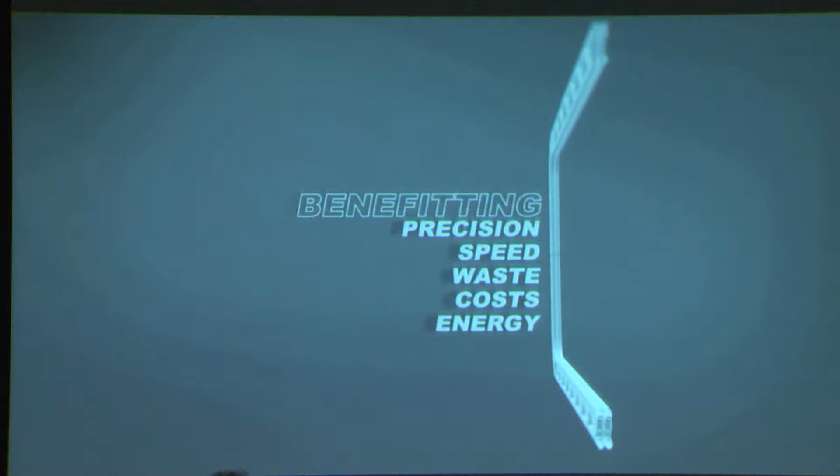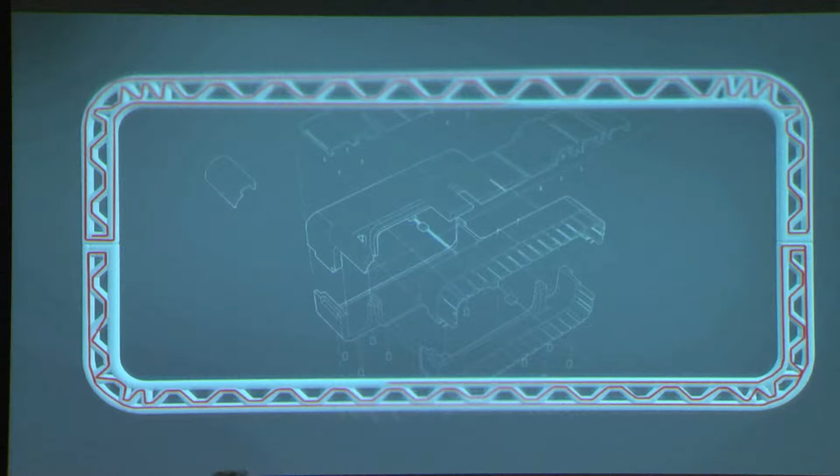in Scottsdale, Arizona. And I joined Gensler about 3 years ago and was asked to work on the project that you're going to see now. Our client had discovered a 3D printer entrepreneur in Shanghai who had developed a concrete mixture and printer head to basically manufacture housing, and we were hired to look at a whole series of prototypes for the United States and Haiti, Ghana, Egypt, and Saudi Arabia, and we put together a whole series of building types. This is one particular module.

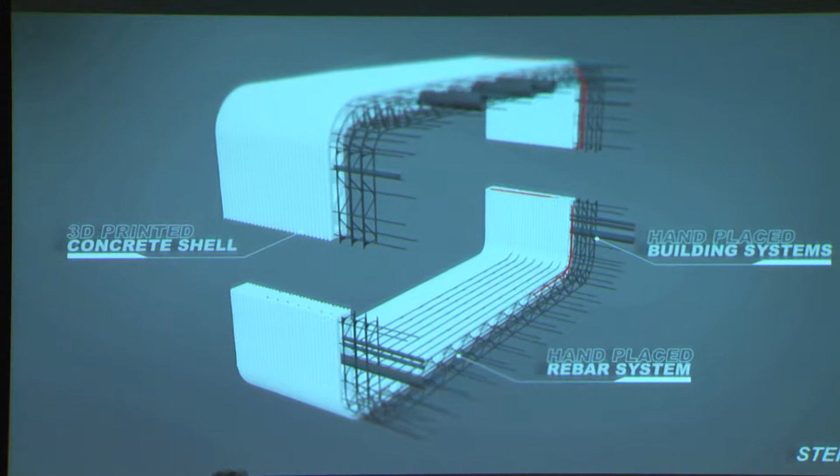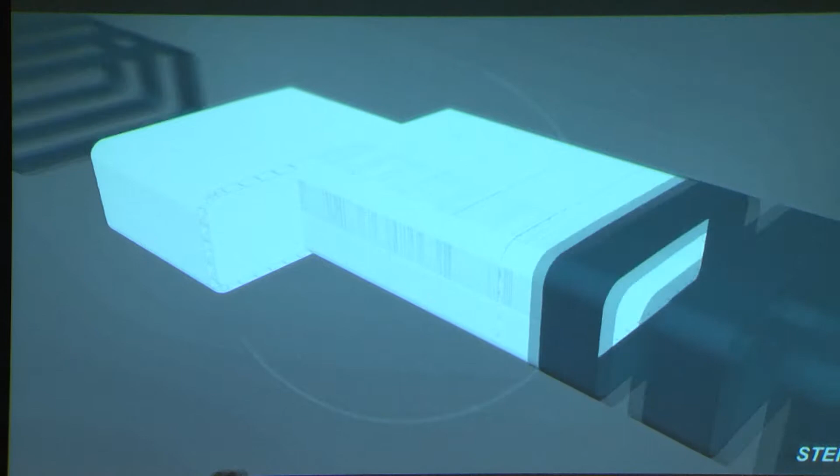After we had finished that study, he sold a building to the Prime Minister of Dubai and gave us 6 weeks to design a building and have it fabricated and installed. And so we began looking at how to do that. The building was printed in Shanghai over a period of 3 days, and then we had to ship it to Dubai in order to have it installed. So you can see, we had to figure out how to do that. It was a whole series of concrete modules. The interior finishes were to be 3D printed. The exterior enclosure was also 3D printed. And that was our concept.

You know, I think I said the components were printed in about three days, and it was erected in a little over a day and a half, probably 2 full days, quite frankly, in the middle of the night when it was a cool 115 degrees in Dubai, since we were doing it in the middle of summer. And this just shows some of the components.

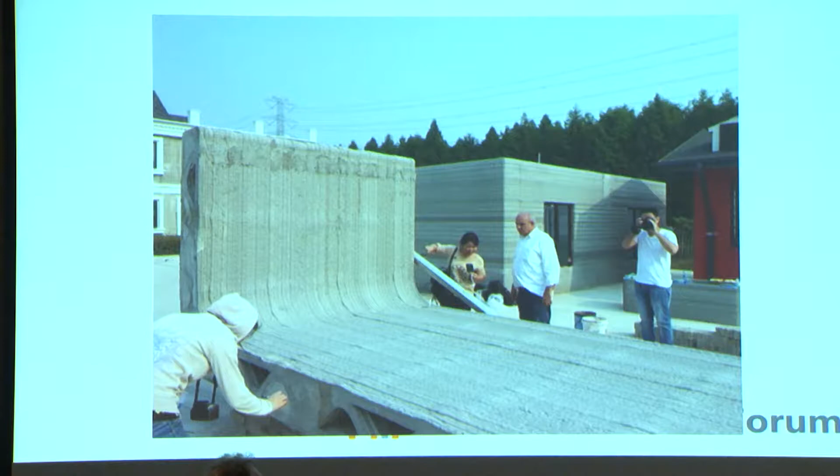The printer had the capability of printing product that was 22 feet wide, 33 feet high, and 105 feet long, which didn't do us much good for shipping overseas. Our components were effectively about 7 feet wide and 11 feet tall. They were put in 2 pieces and 24 to 30 feet long. And you can see them after they've come out of the printer. It's a series of layers of concrete that have been set with the printer in sort of a factory environment.

Here's the pieces arriving in Dubai and being installed on top of each other and next to each other. And the white object on the bottom is the finished building. It was actually a 2,500 square foot office building that they used for the PR and events planning folks at the Office of the Future, which is at the Museum of the Future, which is being developed on the Emirates Tower site here. And the interiors of the building are effectively just open office environment.

The real key was that the structural core was 3D printed. The remainder of the interior construction and exterior enclosure was traditionally built thereafter just because of development costs. We had never printed a single component and built this building without any other options.

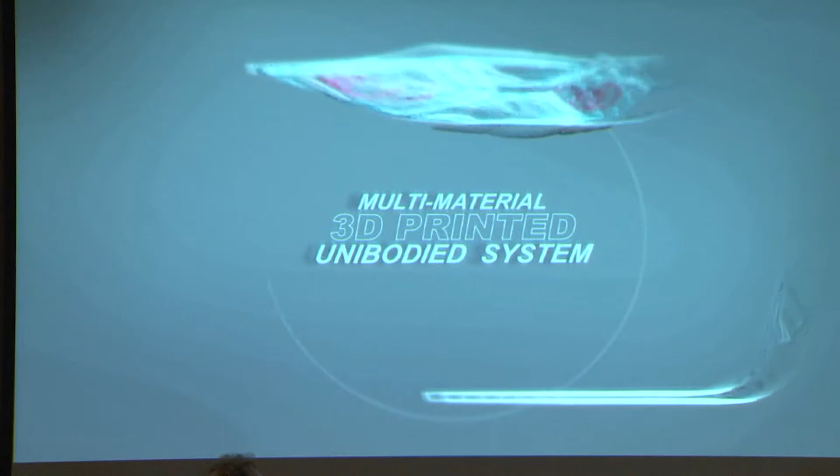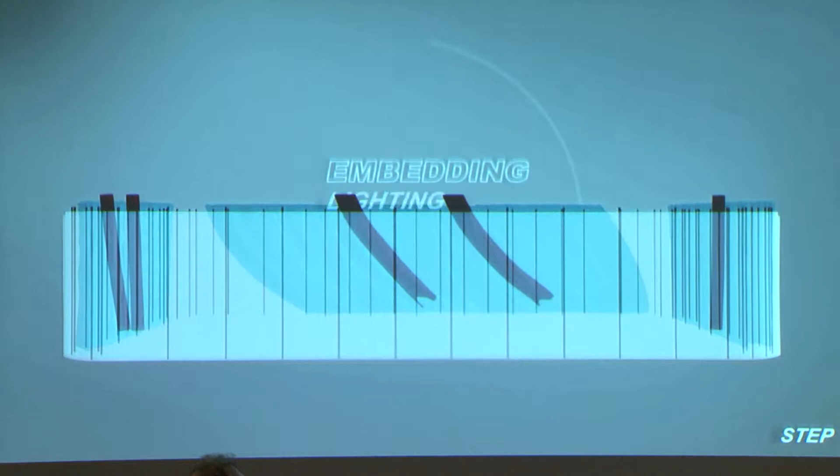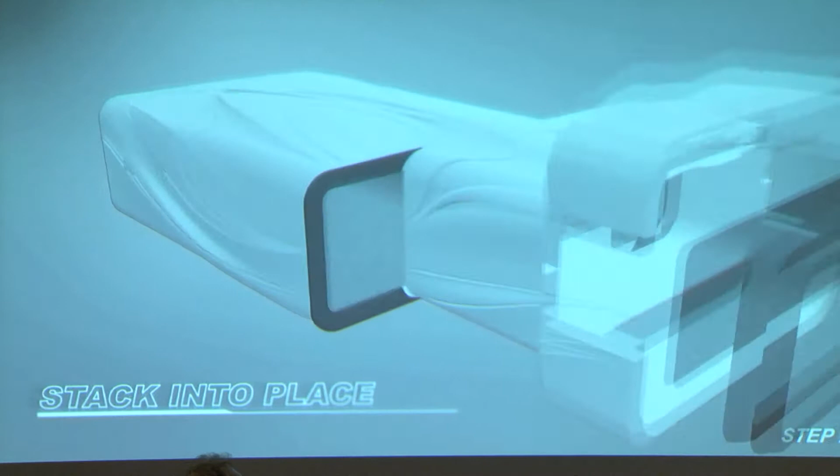Our real desire was to develop a system whereby we could print the entire component of the building, the structural core, the outer skin and the interior finishes, as well as all the MEP systems into the print, and really create a sophisticated smart wall system that would be able to be connected together and bring all the services to the building, and simply connect these components together and build a building essentially that fast. One of these can be printed in about 6 hours, and assembly is as fast as you can assemble. So that's really our goal.

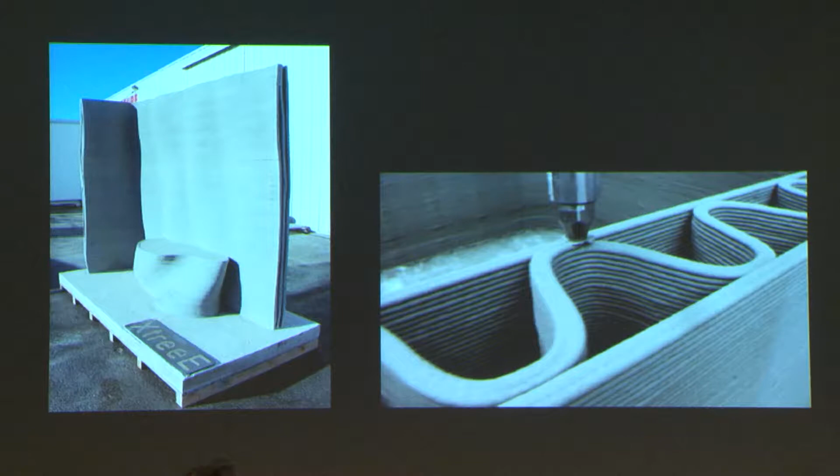We've started working recently with a new group out of France called XtreeE. They're manufacturing printer heads. You can see a bit of the printer head on the lower right-hand side of the film. And they're really looking at maximizing the efficiency of the skin in concrete to minimize the amount of material that you use. This is showing their printer. They just use standard robotic arms with a custom printer head, and we have the capability now to print very, very fine objects at faster speeds.

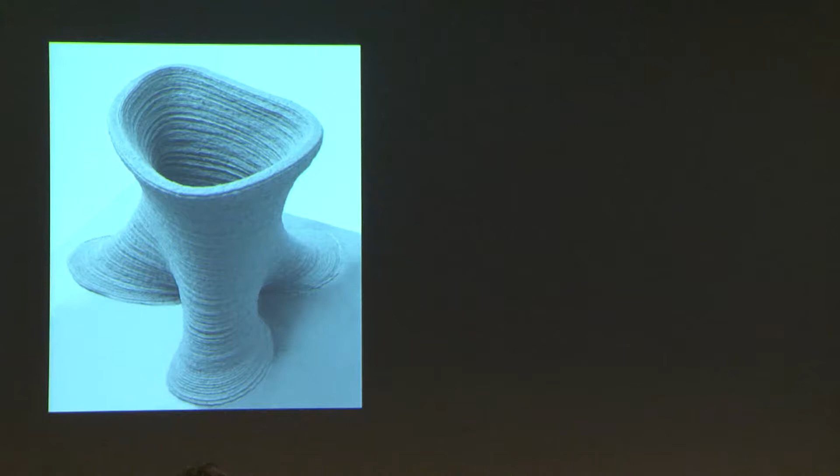The original print we had were layers that were approximately 1 inch thick by 3 inches wide, and now we have the ability to print at about 2 millimeters high by 1.5 centimeters wide, so very thin skins. A lot of very fine detail capability. XtreeE is printing both in concrete and clay. And the clay can be used as a form to pour concrete in, and then you wash the clay away, and you've got a concrete form, and you can actually reuse the clay. So they can do very complex one-off components.

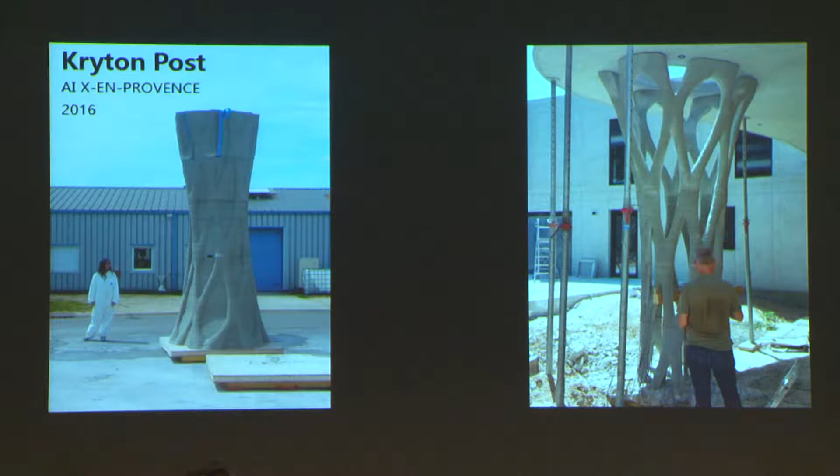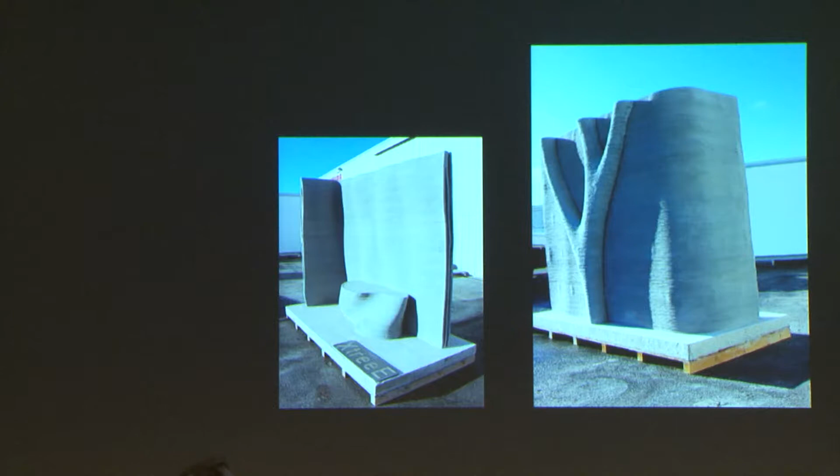The benefit of printing is every single object that you print can be different. So the old concept of modular housing where everything is the same, with 3D printing, that's really not necessary. So it shows the high level of detail that we're able to get. And the other big element of possibility with 3D printed buildings is in terms of the speed of design. We can now design a structure.

Today we design structures three-dimensionally as architects, and then we produce two-dimensional documentation for bidding and permitting. Then the subcontractor will get the two-dimensional drawings and turn them back into a 3D object for fabrication and construction. But with 3D printing, we can design in 3D. We can coordinate the whole project in 3D. We know all the information about the building, the surface area, the quantity, how long it will take to print before we ever start. So we can economize the skin.

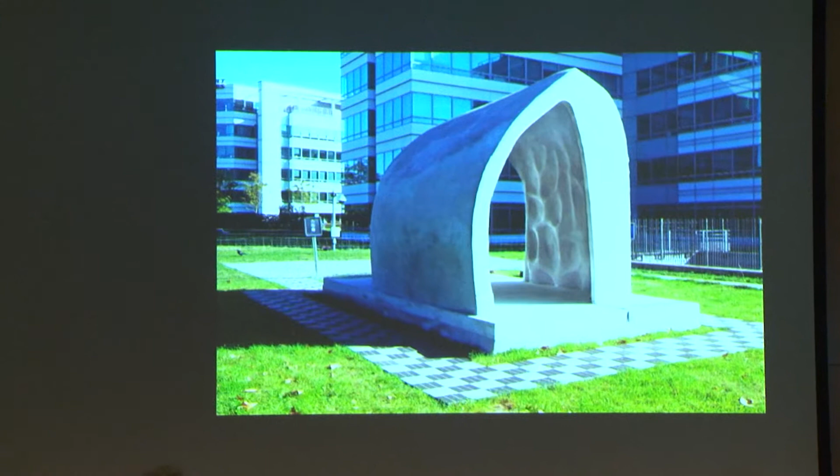And you can see in the interior of this particular object that XtreeE printed, they really optimized the amount of concrete that's necessary to make the shell structure work. So the inner walls are actually bending to the need. And so we can reduce quite a bit of time, because after we finish designing, we can just press print and end up with a building.

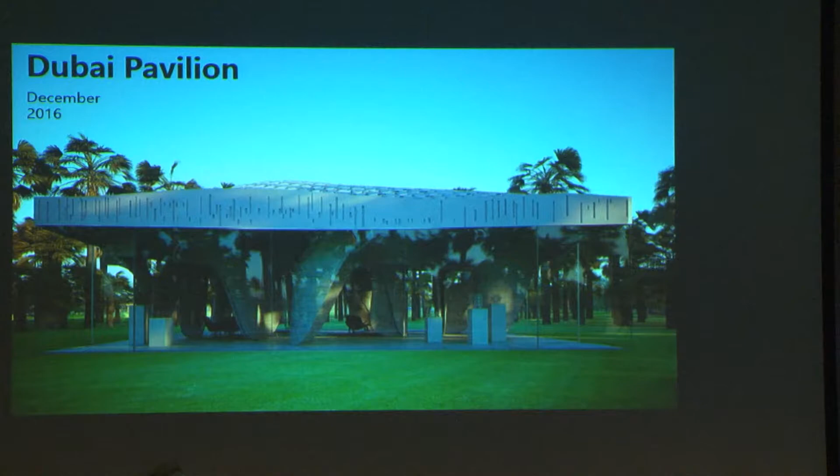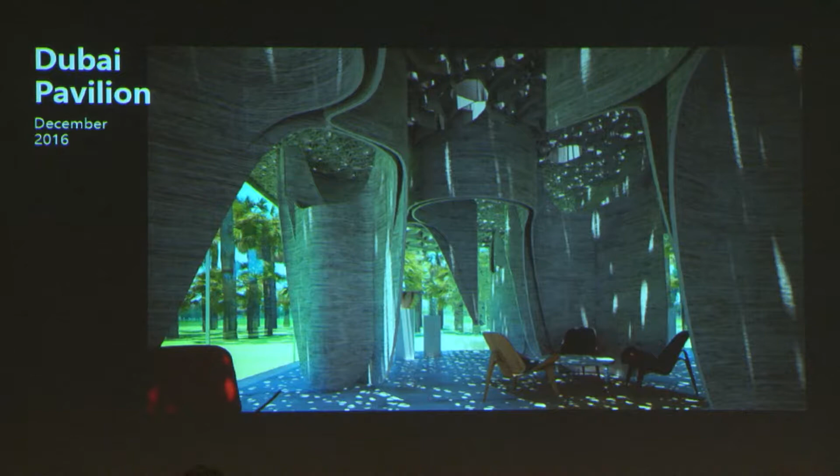And every building, as I said, can be different. The real key today is really trying to develop buildings that really speak to this type of construction. The rectangular form of building, 3D printing allows us endless other opportunities, and really trying to discover what those opportunities are is the next step. So that's it.

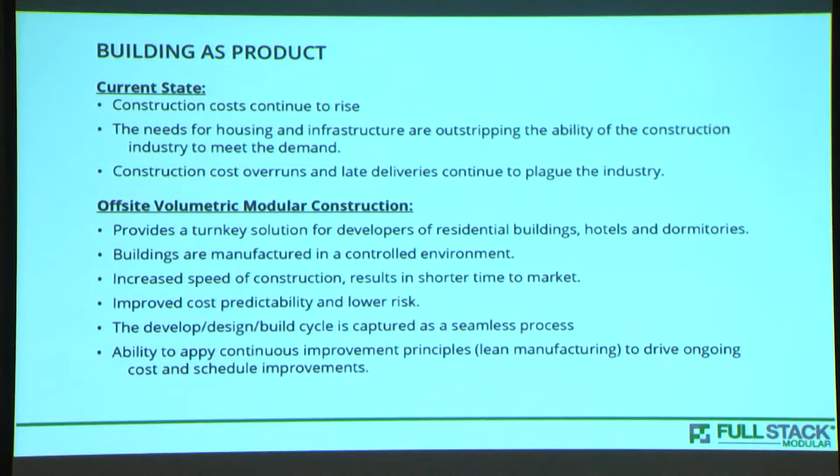And so this is just a little bit of a current state of construction. Construction costs continue to rise. We talked about the needs for housing and infrastructure, and overruns and late deliveries are standard. And as a result of that, and working in New York, which is a high land cost, and I guess if not the highest construction cost in the world, one or two, we as developers were looking for a way to at least control and predict the cost of building products, mostly multifamily, in a dense urban environment. And that's really where the whole high-rise modular process for us started.

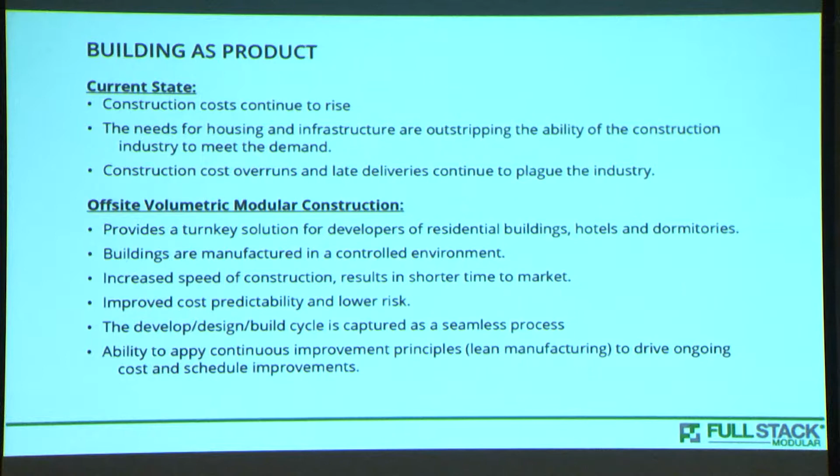In order to do that, you really need to change the process from design, bid, purchase, construct into a completely integrated process. Maybe not by putting in a printer and pressing print, but much in the same idea, at least moving in the same direction. So I figured I was at MIT, I had to have some statistics.

So the current state of the industry, great report from McKinsey, worth reading. It talks about the world economy and how many billions of dollars in the economy it actually represents. For some reason, my slide got cut off, and the turquoise is manufacturing. But it basically just says that construction productivity is flat since 1995. The total economy is up 2.7 times the 1995 productivity, and manufacturing is up 3.6 times 1995. What does that mean? It means the productivity on kind of an hour worth of a $25 rate is significantly higher in every industry and very high in manufacturing.

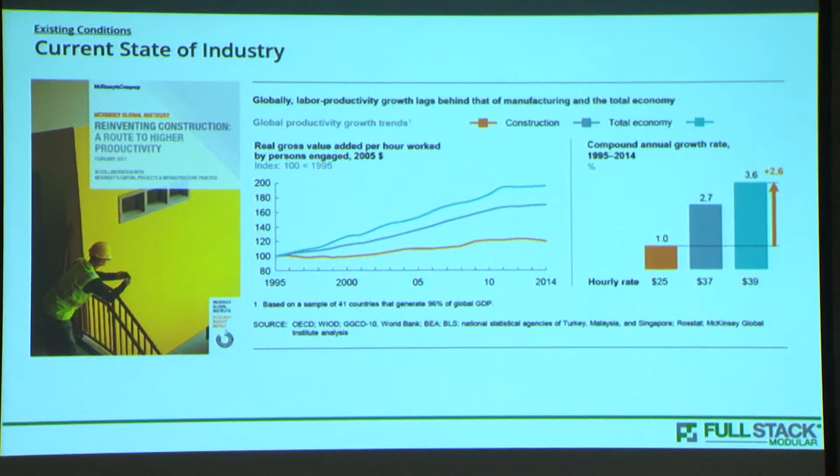And the interesting thing to think about, and I am not a world economist, is the amount of drag that the lack of construction productivity has on the whole world GDP. The fact that we are not productive not only affects our ability to have housing, but it also affects the world economy as a whole.

So our process is as design builders for developers or with developers to create an off-site modular solution for multifamily housing, for the most part, in a dense urban environment.

And so doing and building off-site in a dense urban environment where it's very expensive, security, transportation, et cetera, is tough. It's incredibly attractive. On the other hand, in places that are a little less dense and a little more spread out, sometimes manufacturing things but assembling them on site is a more attractive environment. It really depends on where you are and what you're doing.

The big issue, again, not to just press print, but our design process creates a 2D design turned into a model, exploded into pieces and parts, which then are turned into production drawings, which we manufacture in the factory, that has all of the knowledge of how long it's going to take to build, how much material is in it, et cetera, so on and so forth.

And in the factory, we have adapted a lean process by which we manufacture things task by task, not trade by trade. And we literally break each individual part into sub-assemblies to the extent possible to make sure that we can move the production process along as fast as possible.

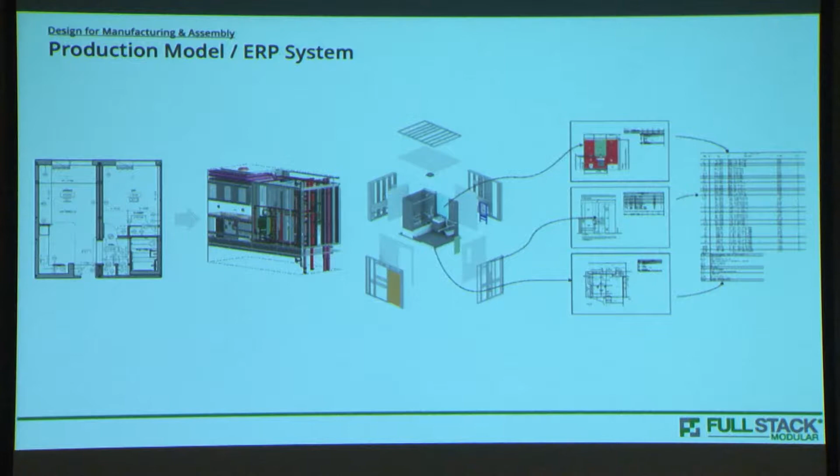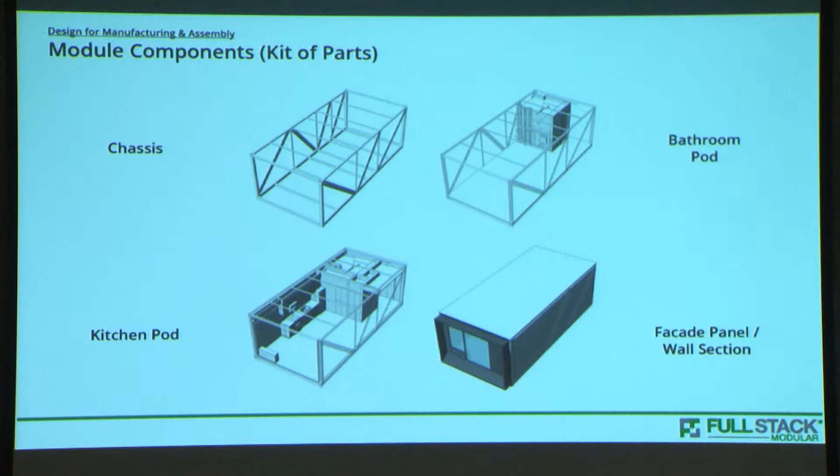This is a little nomenclature of our world. We build our multifamily buildings out of a steel chassis. It's a non-combustible product. We build sub-assemblies like bathroom pods and kitchen pods. We actually put the facade on in the factory, we wrap it up, and then we send it out to the site. And these are some of those sub-assemblies.

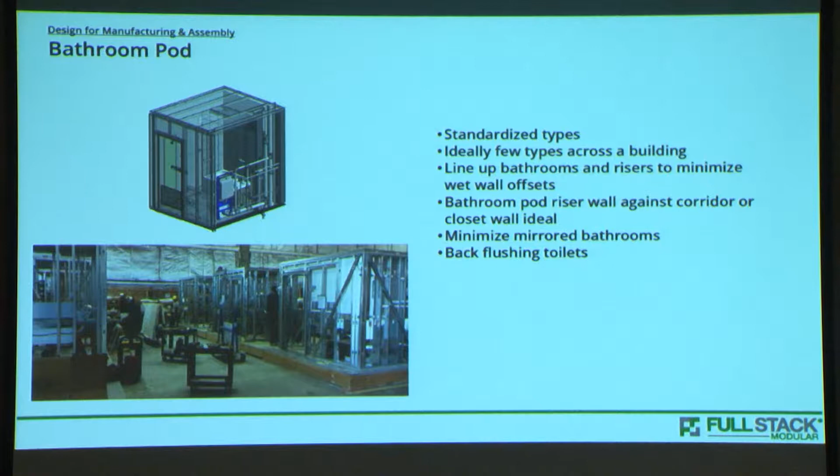This is our bathroom pod manufacturing area. That's what the design of a bathroom pod looks like. Actually, it as a sub-assembly is being adapted all over the world in a whole bunch of uses, hospitals, concrete poured buildings, et cetera, because the amount of trades that are required in order to do a bathroom is far more than there actually is space within the bathroom to manufacture it.

Kitchen pods, the same thing. Something that's always fascinated me, I know that we build kitchens in spaces, but the idea of taking 62 boxes to make a 10-foot kitchen, it doesn't make any sense. And in our factory, we can actually build them as one piece or two pieces, top and bottom, and it makes the process go much cleaner.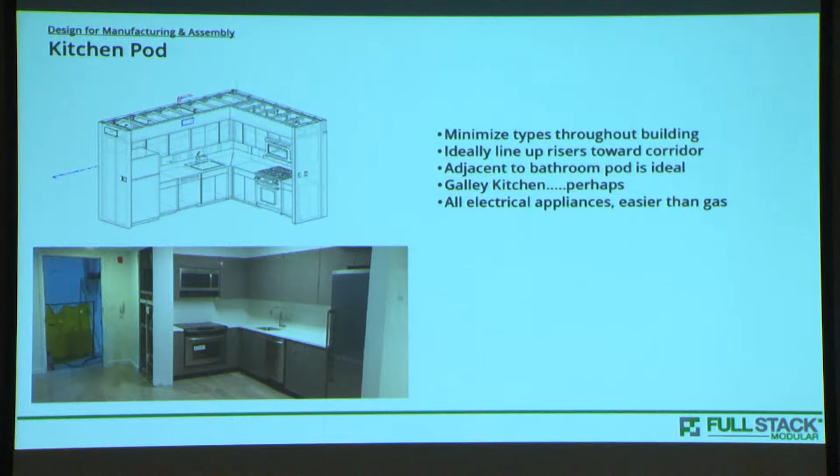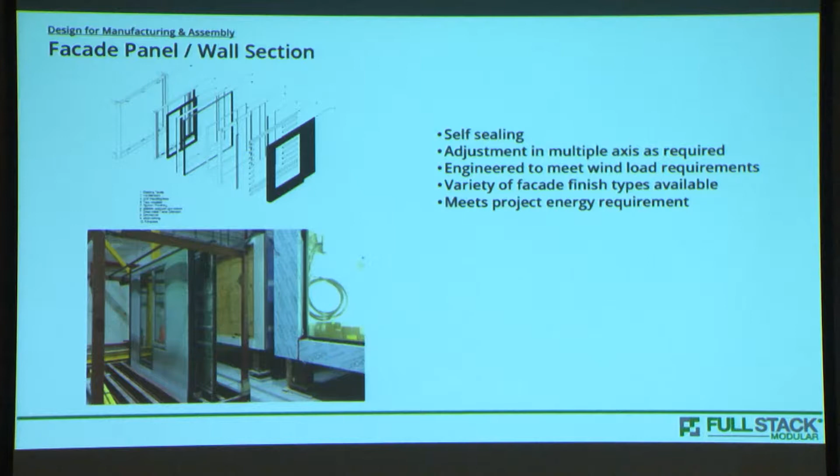We also have developed a self-sealing facade system, which eliminates the need for scaffolding, increases the safety, and also the water tightness of the building. And especially in New York, it's proved to be very, very helpful along that side. And scaffolding in New York on a 20-something story building is a couple of million dollars, so it's a nice savings. And that's actually a picture of the top of the building. From below, there were 3 different facades on this one in particular.

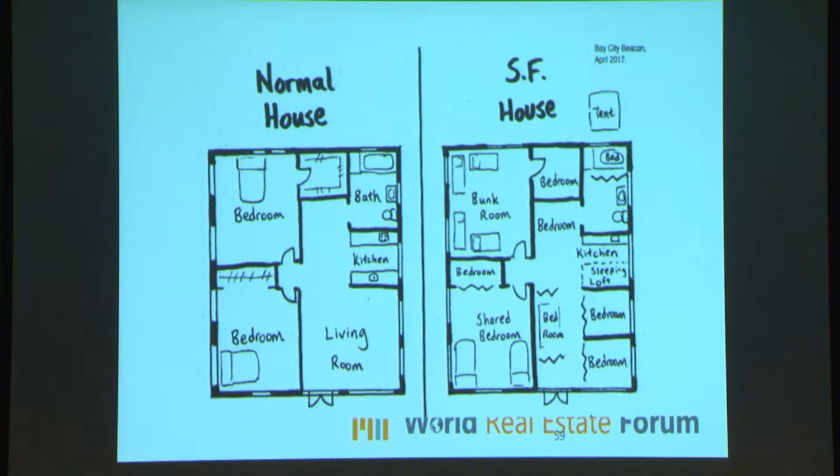They take this bedroom and make it into a hacker bunk room. They take this room and add 2 bedrooms. They carve up the living room into 2 more bedrooms. They carve up the closet into a bedroom. And this is my favorite one. They put a bed over the bathtub. This is not too far from the truth. There are constantly articles about young people living in laundry rooms, walk-in closets, and the like in the Bay Area.

The solution that I think is a solution is as follows. And that is, we need to build housing that's car-free, that has what I call micro-design in it, and that's modular. The first of these, car-free, is easy. It's also economical, and we deal with it in the following fashion. We don't provide any parking in our buildings. That simplifies things dramatically and it lowers costs.

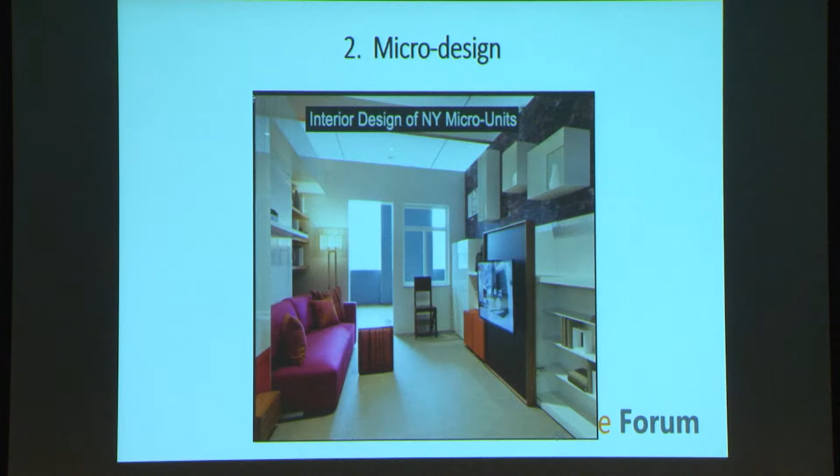The second component of what I think is necessary for affordable housing is what we call micro-design. Now, by micro-design, it doesn't have to mean tiny. It happens to be tiny in many cases in our buildings, but it's not necessarily just super small. What it is, more importantly, is super smart.

And to illustrate that, I'd like to show you a studio apartment that our project manager, graduate of MIT, Zach Shore, 2012, stayed in when he first came to work for me, a studio apartment in a high-rise in downtown San Francisco called Nema. It was 687 square feet, and I think he paid $3,600 a month for that. We have taken that same 687 square feet and distilled it to what we call essential housing, and that is the bedrooms, bathrooms, kitchen, and living areas. And we took that 687 square feet and concluded that we did not need 27 square feet of it, and we built and are building 660 square foot, 4-bedroom apartments in San Francisco now.

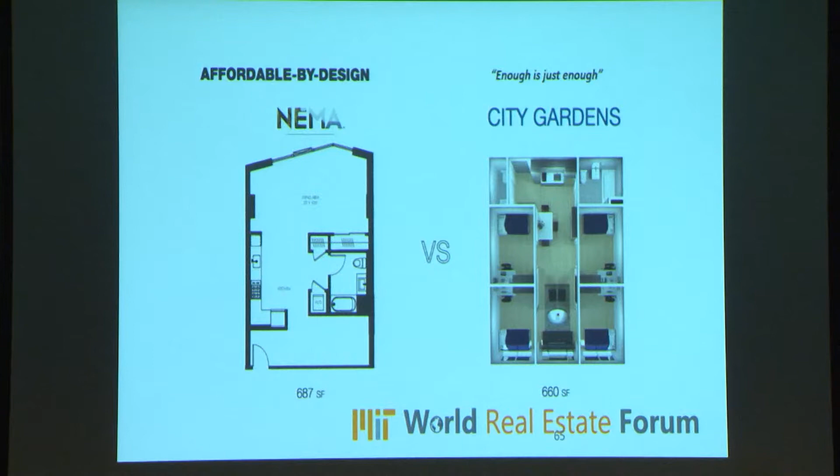Now, you may think, my God, that's horrific, 70 square feet. But we have built this unit. You can come see it at our office in San Francisco before you pass judgment on it and experience it. We build prototypes, we furnish them, we design it as carefully as someone designing an iPhone to get every component right. And that's actually why we know enough is just enough for this particular clientele.

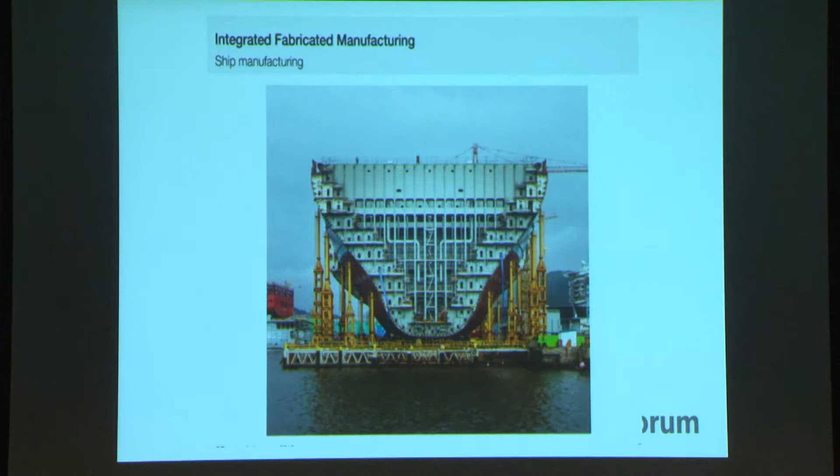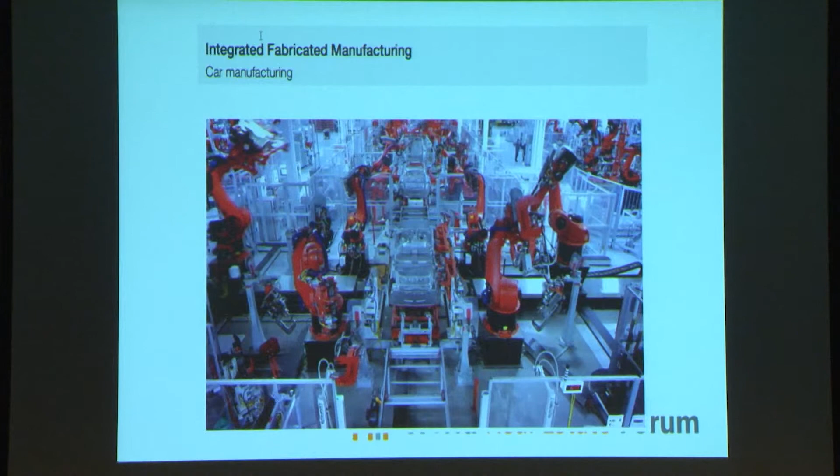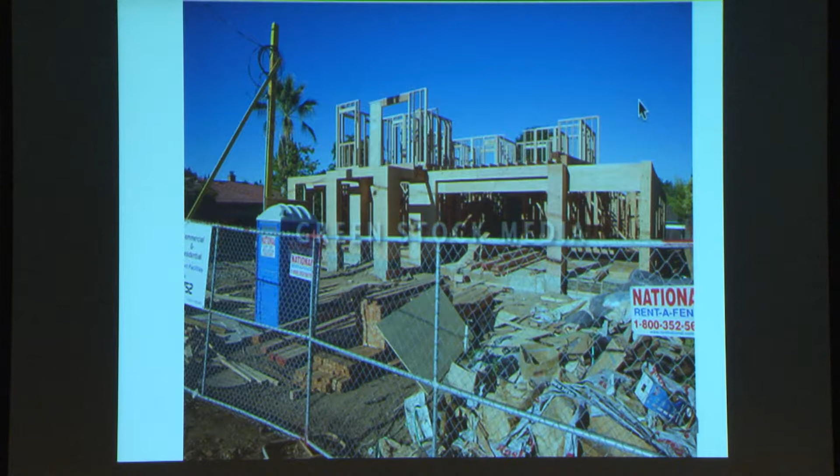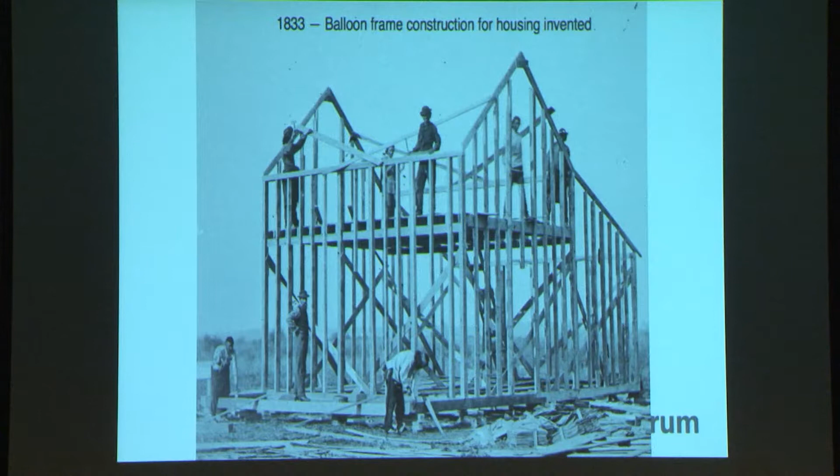And in fact, if you look at residential construction in the United States, you can see that the last major technological advance was in 1833 in Chicago, when stick frame, balloon frame construction was popularized, and which enabled the vast expansion of the West. Now, I want you to pay attention to this gentleman here, Rufus, and this gentleman here, Zebediah, because we're going to fast forward them 184 years, and that's where we are today with the same process. You know, give them a nailing gun and a hard hat, and they would be rocking and rolling in a few minutes.

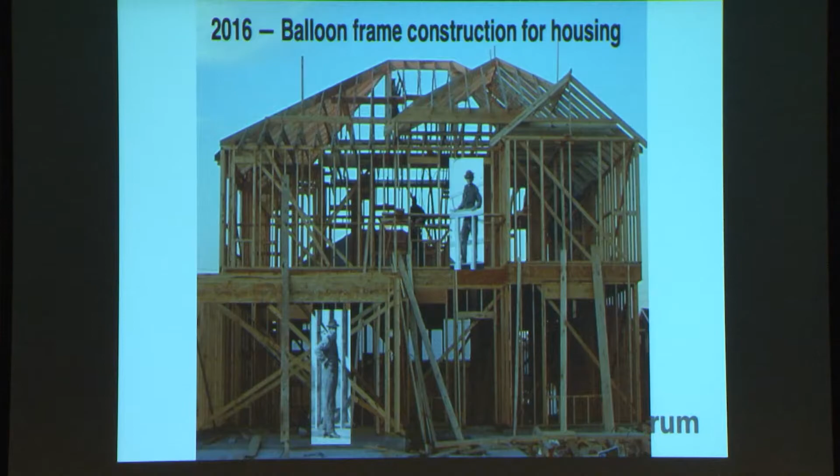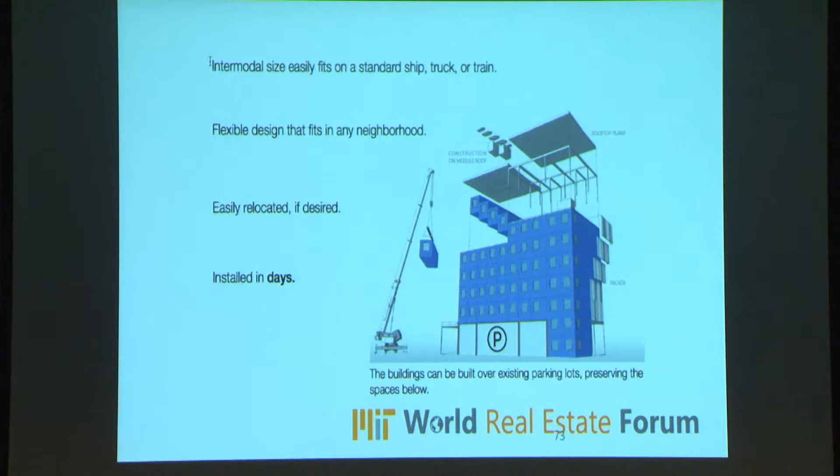So we think disciplined modular. By the way, we like smaller modules. They have to be intermodal in size, flexible in design, and easily relocated if necessary. And this, we think, is the factory of the future.

Our typical modulars look like this. They resemble a container, but they are not containers. These are specially made, specially reinforced, and brand new. By the way, container technology is interesting, but no California engineer will sign a project with used containers. It's a non-starter to produce large numbers.

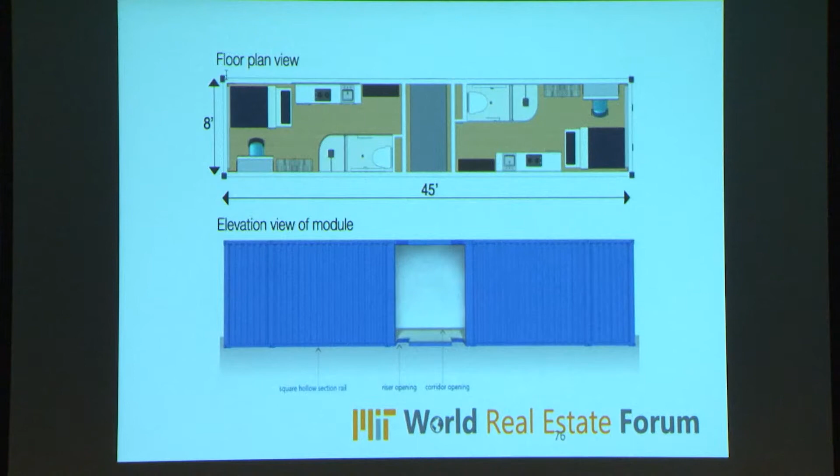Streamlined, you'll have to just take it on faith that that's streamlined production and delivery. And unfortunately, I didn't show you how quickly we can build, but we can build one floor a day, and the outside of the building will look like this. And that's a really important thing about the modular technology that we use. The insides are done. They come with linen, furniture, coffee makers, coffee cups, everything.

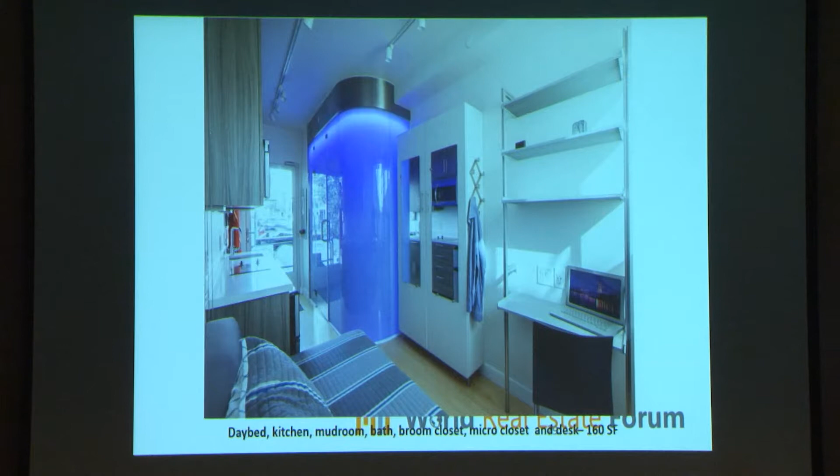And that's the inside of a micropad, which we just built in November, and which we're hoping to pitch to cities throughout the United States as a solution to homelessness. The fit and finish in here is better than anything I could ever produce on the job site, even with Florentine craftsmen. It's a simple production, and it saves about 40 to 50% of the time. Roger, you can probably chime in on this.

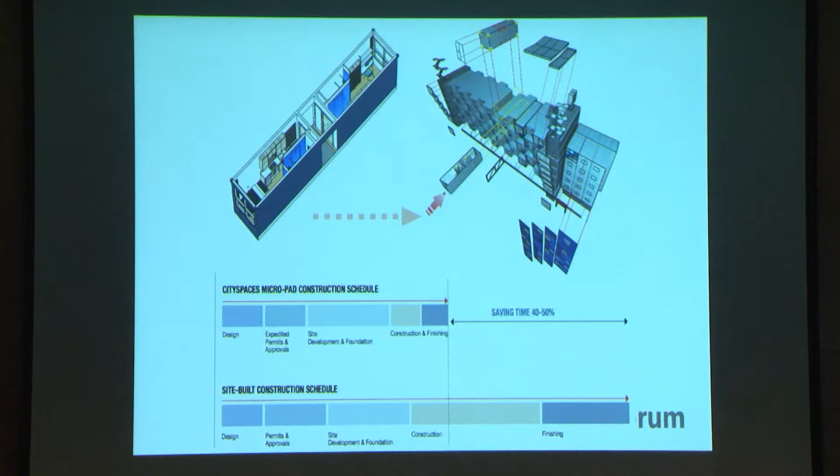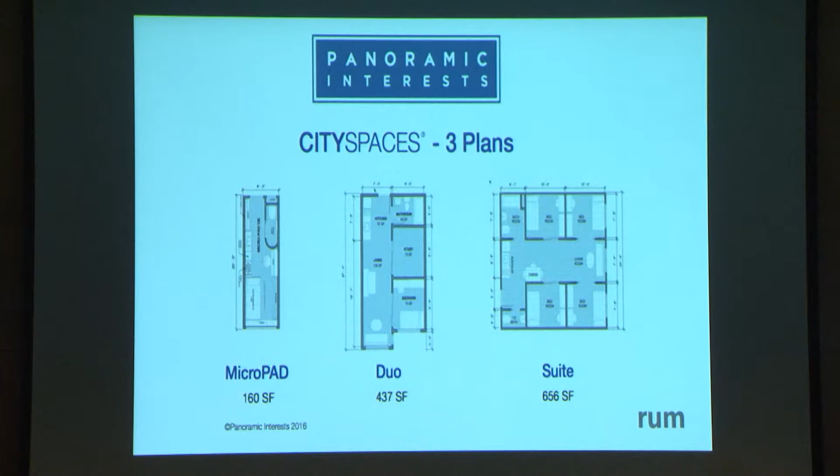The last part about the modular that I happen to think is necessary is that we need to standardize and have discipline in design. And as it is, we have three designs. We have the micropad, the duo, and the suite. Now, this concept is better understood in California when I put it in terms that they understand, which is the In-N-Out Burger model. How many of you have been to In-N-Out Burger?

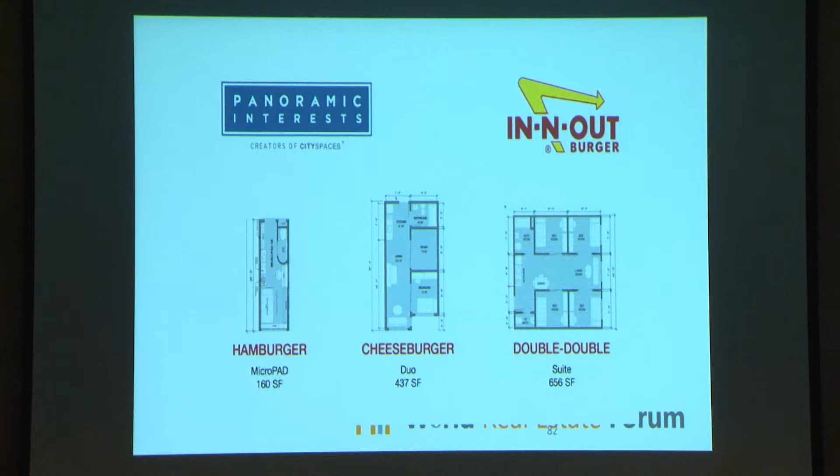Okay. Well, for those of you that have not been to In-N-Out Burger, I would say it is called slow fast food. It's the fast food place that Anthony Bourdain goes to when he gets to LA and when he leaves LA. It's a great place. It's a model of efficiency. It's a hip place to work, and it's very, very economical. And when you have modular design and standardization, you can then put some serious numbers up for housing. And this is an example of what we could do if we built all studio apartments with one boat, 10,000 units on that boat alone.

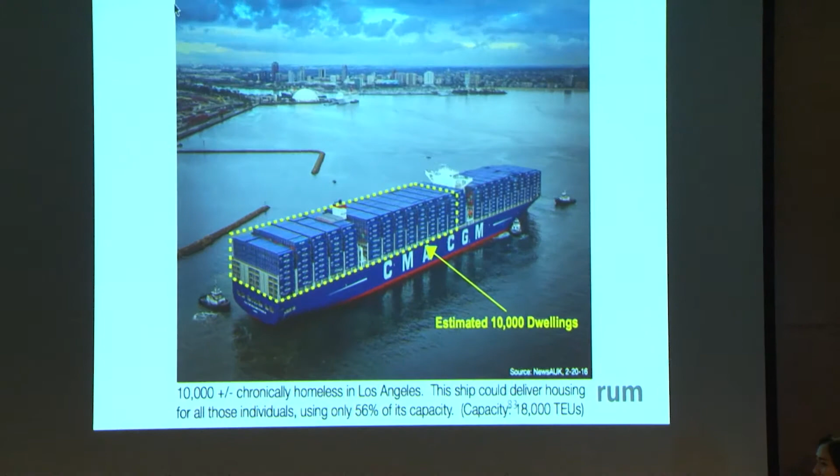So, to conclude, I'd like to remind you of the three things that I think are necessary to build affordable housing: car-free, micro-design, modular. Now, this is my throwdown, smackdown challenge to MIT. The software in the construction industry was largely designed in the 20th century, right, with Euclid v. Ambler, the famous zoning case, 1926. The hardware we just saw, that comes largely from the 19th century, stick frame construction. Isn't it time that we entered the 21st century? And thus is my challenge to MIT to get with the program here. Thank you very much.

Thank you, Patrick. So you hire all the A students? Is it true that the A students all work for the B students? You know, I didn't ask Zach his grades. Yeah. Probably. That's funny. I'm sure he was. Did you have Zach as a student? Zach Shore, he was class of 2013. You had them all, you're right. I didn't ask him his grade in Bill's class in particular because I knew it was irrelevant, right? But this is a perfect grade card that you show after all the work you have been doing. This is the real report card, right. Thank you so much.

Thank you for your fabulous work. I would like to take some minutes to ask some questions, and then we can open the question to our audience. So first of all, I think all of your presentations imply one of the problems in the construction industry is that it just doesn't have enough incentive for innovation. So I want to ask you, how did you start your career to push these groundbreaking technologies in such a traditional industry? And what is your biggest struggle? I want to ask Roger to start first.